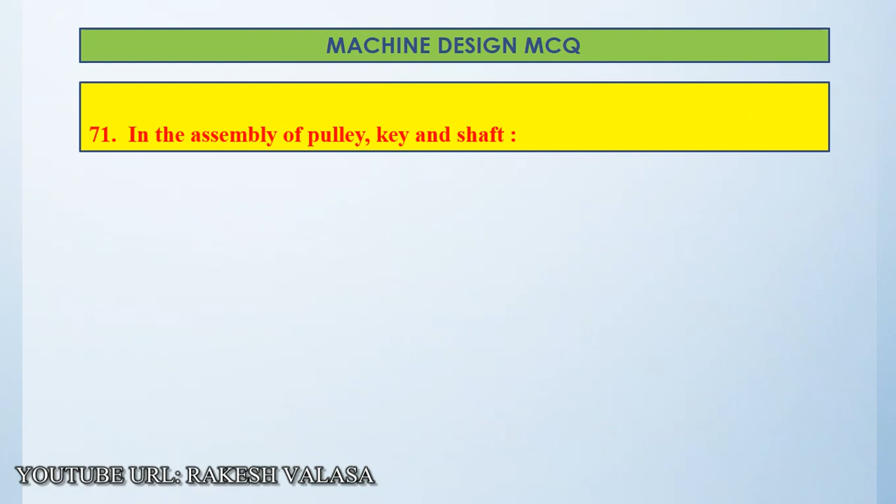Multiple choice questions on machine design, part 8. Question number 71. In the assembly of pulley, key and shaft: Option A, pulley is made weakest. Option B, key is made weakest. Option C, shaft is made weakest. Option D, all the three are designed for equal strength.

The correct answer is option B, key is made weakest. Let us see the explanation. Key is the weakest member in the assembly of shaft, pulley and key. Key acts as a safety device. Whenever excess load appears on the pulley, the key fails first and keeps the shaft and pulley safe. So the correct answer is option B.

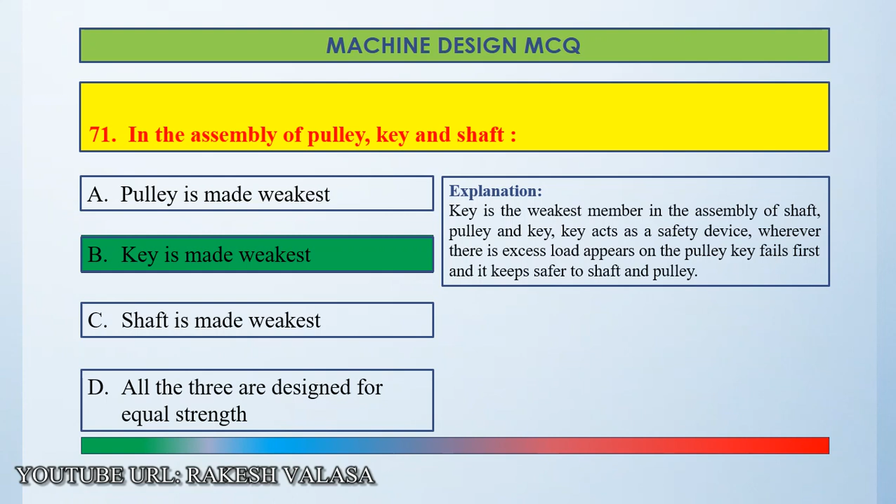Key is made weakest. Question number 72. Crankshaft and gears are made from: Option A, grey cast iron. Option B, white cast iron. Option C, nodular cast iron. Option D, none of these. The correct answer is option C, nodular cast iron. Let us see the explanation.

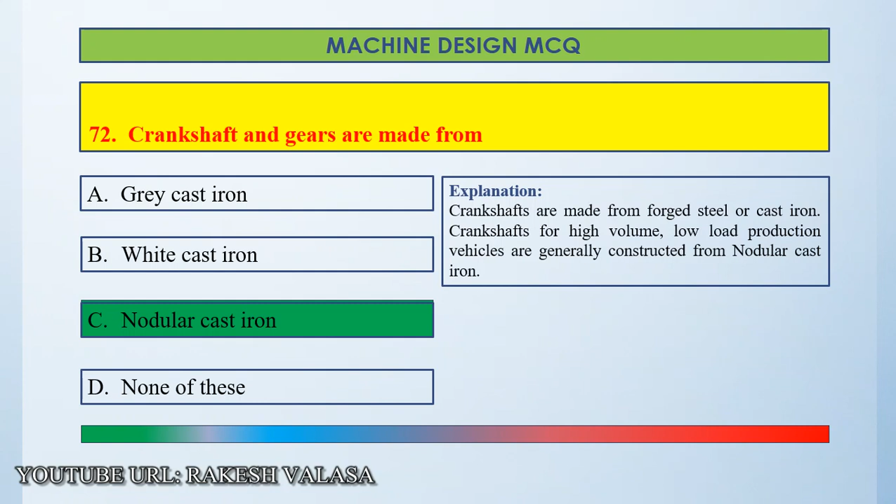Crankshafts are made from forged steel or cast iron. Crankshafts for high volume, low load production vehicles are generally constructed from nodular cast iron. So the correct answer is option C, nodular cast iron.

Question number 73. The coupling used to connect two shafts with large angular misalignment is: option A, flange coupling; option B, an Oldham's coupling; option C, a flexible bush coupling; option D, a Hooke's joint. The correct answer is option D, a Hooke's joint. Let us see the explanation.

Hooke's joint is used to connect two intersecting shafts and is used in automobiles to connect the propeller shaft. A Hooke's joint is used to connect two shafts which are intersecting at a small angle. So the correct answer is option D, a Hooke's joint.

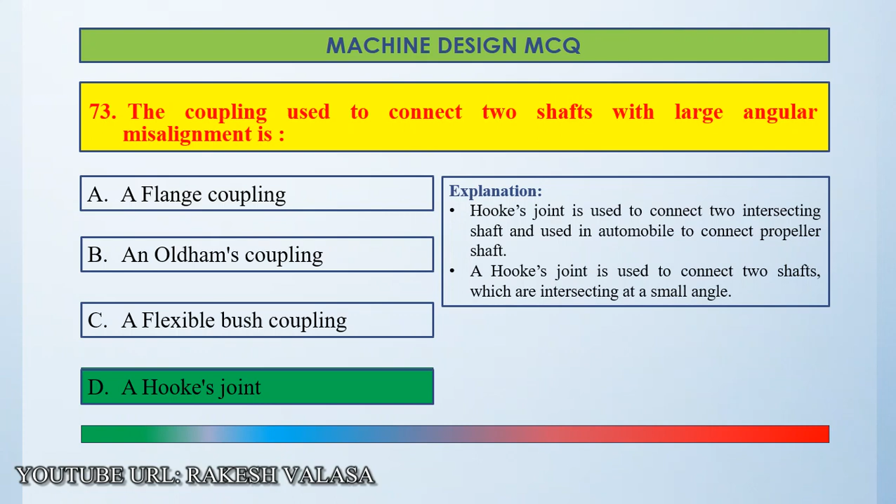Question number 74. When the shafts are slightly misaligned, the most suitable coupling to connect them is: option A, rigid coupling; option B, flexible coupling; option C, Oldham coupling; option D, none of these. The correct answer is option B, flexible coupling. Let us see the explanation.

When the shafts are slightly misaligned, the most suitable coupling to connect them is flexible coupling. Examples: muff coupling, split muff coupling, flange rigid coupling. When the shafts are not misaligned, the most suitable coupling to connect them is rigid coupling. Examples: bushed pin coupling, Oldham's coupling, and universal coupling. So the correct answer is option B, flexible coupling.

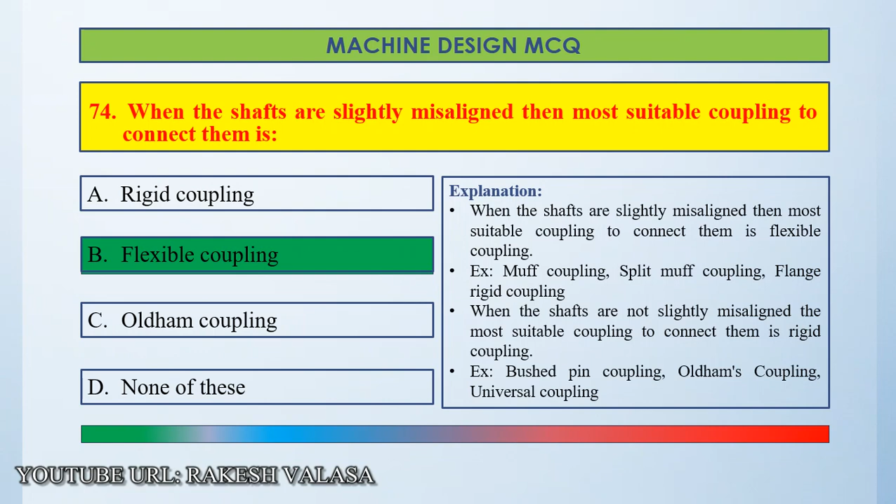Question number 75. Blank is a cylindrical rod threaded at both ends and left plain in the middle. Option A, shaft; option B, spindle; option C, stud; option D, bolt. The correct answer is option C, stud. Let us see the explanation.

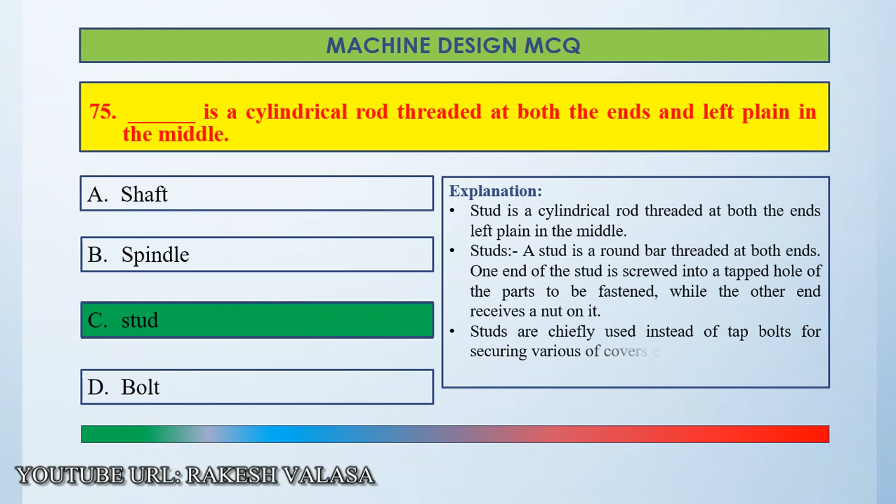Stud is a cylindrical rod threaded at both ends, left plain in the middle. A stud is a round bar threaded at both ends. One end of the stud is screwed into a tapped hole of the parts to be fastened, while the other end receives a nut on it. Studs are commonly used instead of tap bolts for securing various covers. Example: covers of engine and pump cylinders. So the correct answer is option C, stud.

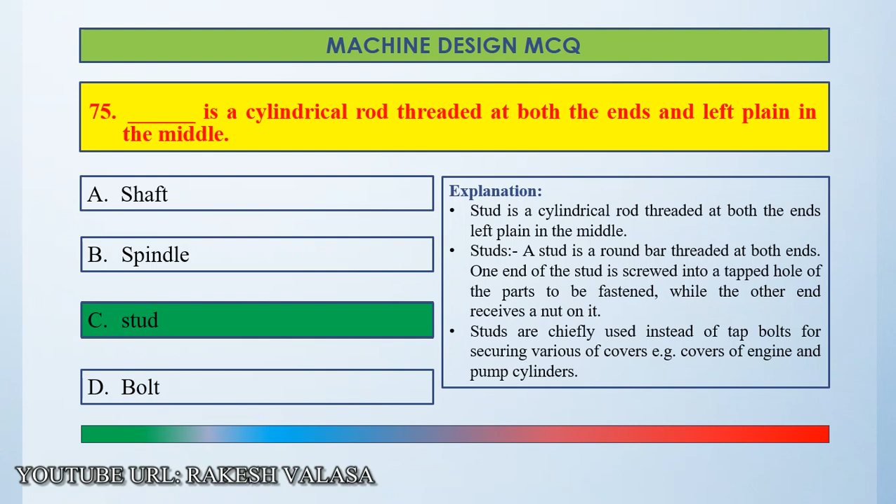Question number 76. When large quantities of bolts are to be purchased, the quantity is usually specified in terms of: option A, number; option B, volume; option C, weight; option D, packets. The correct answer is option C, weight. Explanation. When large quantities of bolts are to be purchased, the quantity is usually specified in terms of weight. So the correct answer is option C, weight.

Question number 77. Which of the following steel keys is usually strong in failure by shear and crushing? Option A, rectangular; option B, square; option C, circular; option D, flat. The correct answer is option B, square. Explanation. Square key is usually strong in failure by shear and crushing.

The industrial practice is to use a square key with sides equal to 1/4 of the shaft diameter and length at least 1.5 times the shaft diameter. Here, width B equals H equals D/4, and length equals 1.5D. B is the width of the key in millimeters, H is the height of the key in millimeters, L the length of the key in millimeters, D the diameter of the shaft in millimeters. So the correct answer is option B, square.

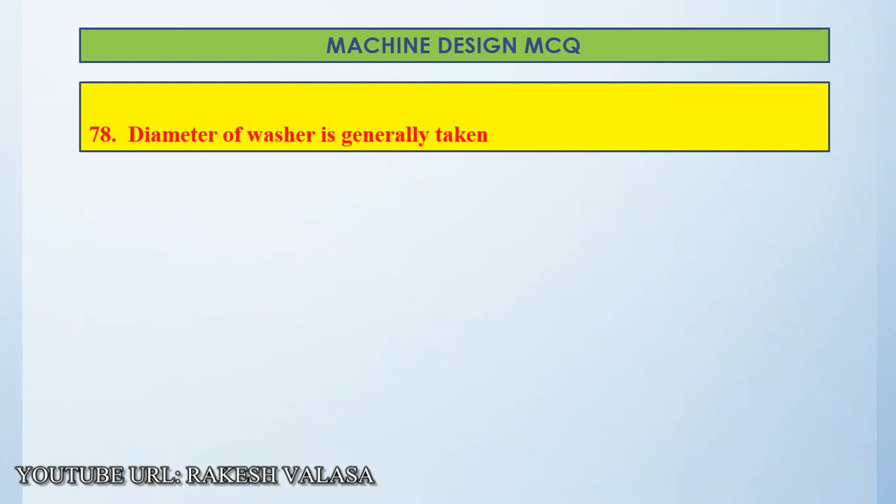Question number 78. Diameter of washer is generally taken: option A, equal to nut size; option B, less than nut size; option C, bigger than nut size; option D, any size irrespective of nut size. Correct answer option C, bigger than nut size. Explanation. Diameter of washer is generally taken bigger than nut size. So the correct answer is option C, bigger than nut size.

Question number 79. Bolts are designed on the basis of: option A, direct tensile stress; option B, direct shear stress; option C, direct compressive stress; option D, direct bearing stress. The correct answer is option A, direct tensile stress. Explanation. Bolts are designed on the basis of direct tensile stress.

Question number 80. Blank is used for friction lining in brakes and clutches. Option A, nylon; option B, Ferodo; option C, leather; option D, aluminium. The correct answer is option B, Ferodo. Ferodo is used for friction lining in brakes and clutches.